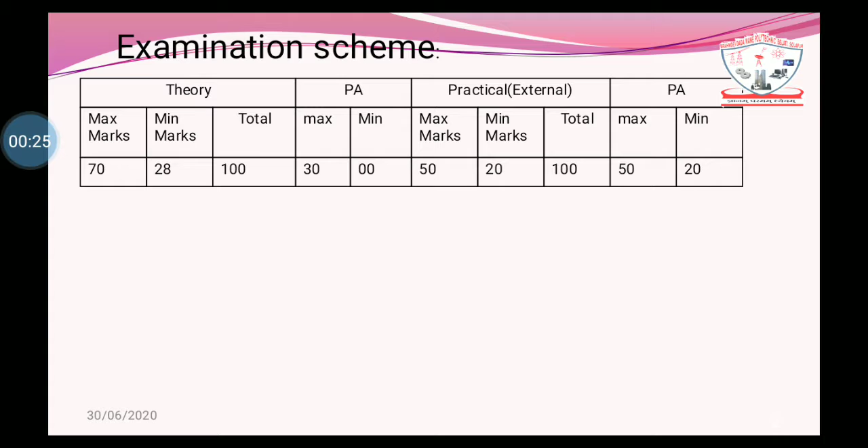So today we will start the session on Advanced Manufacturing Process, under the program Mechanical Engineering 5th semester. In the last session we saw the examination scheme related to this subject. So today we will directly start the new topic, laser beam machining process. Before going to the presentation, we will see a short video of the actual laser beam machining process.

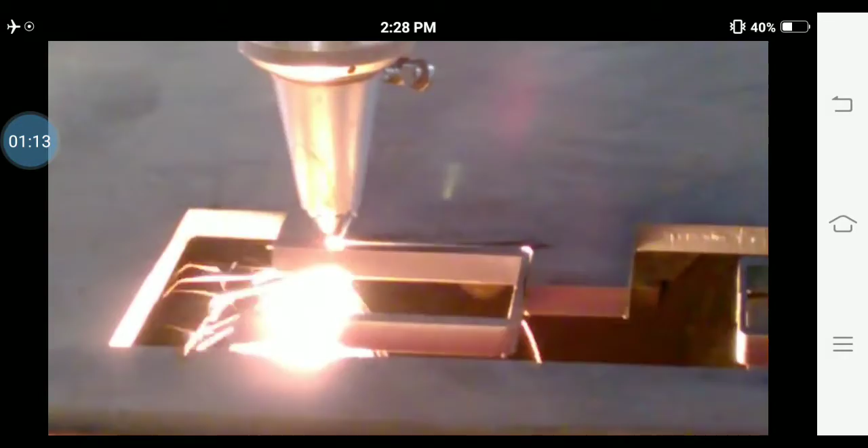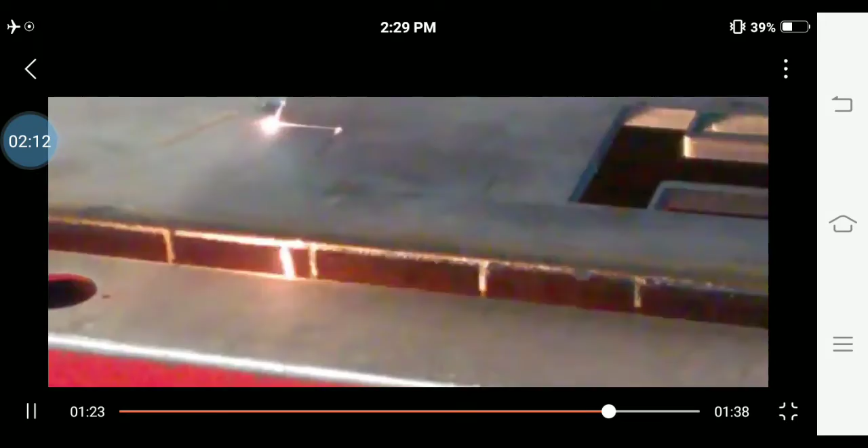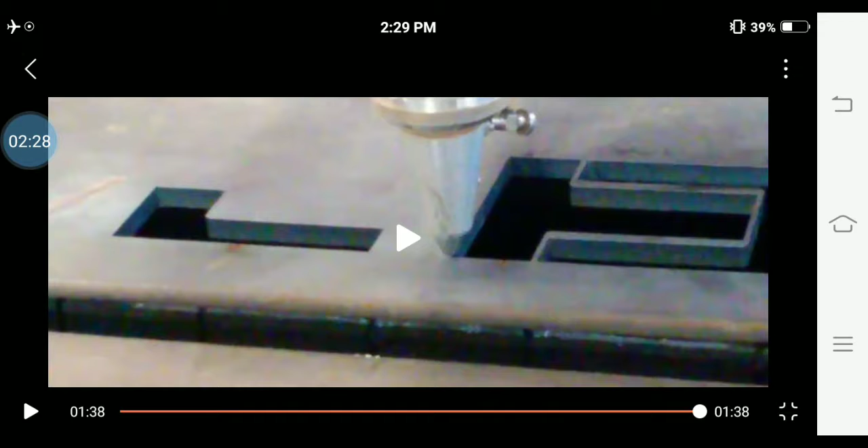Here in this video we can see a laser beam cutting the given plate into a number of different shapes. So here we will see the contents: first introduction, then basic principle, laser concept, actual laser beam process, mechanism of material removal, advantages of LBM and disadvantages of LBM.

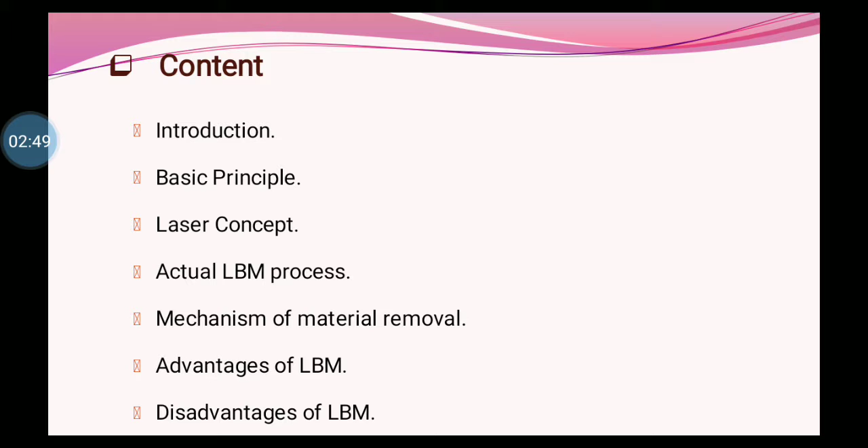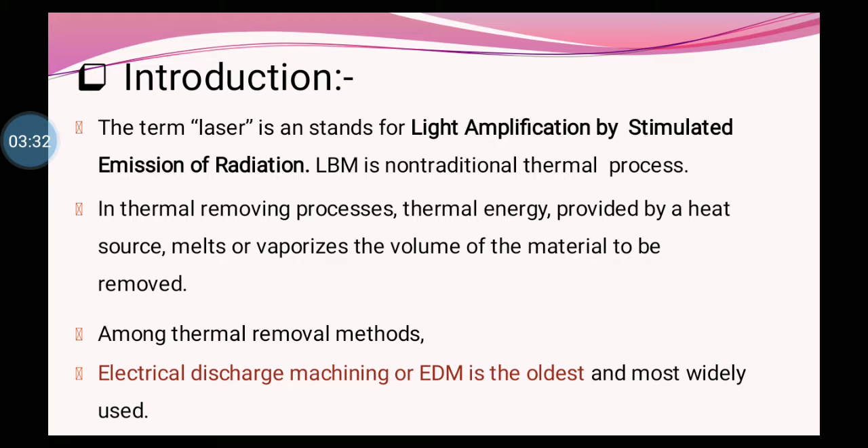So first, in the introduction, the term laser stands for light amplification by stimulated emission of radiation. LBM is a non-traditional thermal process. In this thermal process, material is removed by thermal energy provided by a heat source. It means the volume of material to be removed from the workpiece is melted or vaporized. Among the thermal removal methods, electrical discharge machining is the oldest and most widely used.

So here, the principle: laser beam machining is based on the conversion of electrical energy into light energy and then into thermal energy. It means the electrical energy is converted into light energy in the form of photons, and that light energy impacts the workpiece. There thermal energy is created, so heat is produced in that section of the workpiece and the metal starts to be removed.

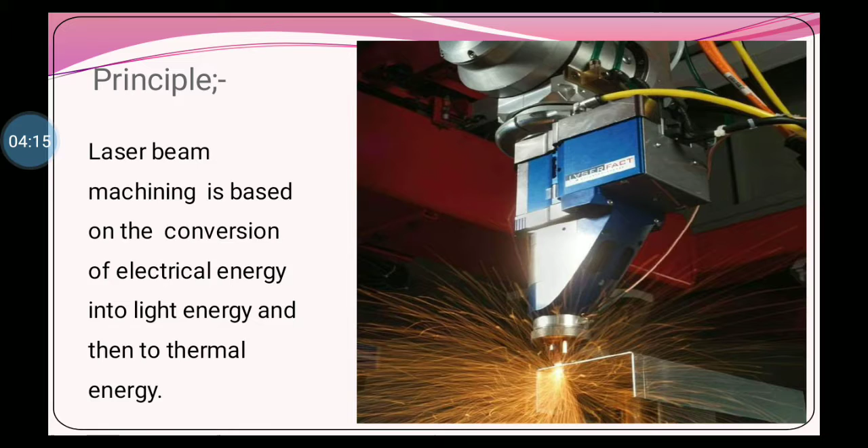Laser concept: electrons, or charged particles, carry some energy related to the orbit in which the electrons revolve. Generally the electrons present in the outermost orbit of the atom take part in the process of energy absorption and emission, and the ground state, the state with lowest energy, is the most stable state for the electron. After absorbing energy, electrons jump to a higher energy level instead of staying in the lower energy level.

It means in the laser, when light rays impact on a ruby rod, or another type of laser rod, the energy is absorbed. When the energy is absorbed, the electrons inside the atom jump into the higher energy level. So at that time they are unstable.

We can see in the diagram that the electrons of the outermost orbit jump to a higher level orbit. At the higher level orbit they are unstable, so they return to the ground state, the low level. When they travel from the higher level to the lower level, they emit some photons, and those photons work as a laser. That is the basic photon emission model.

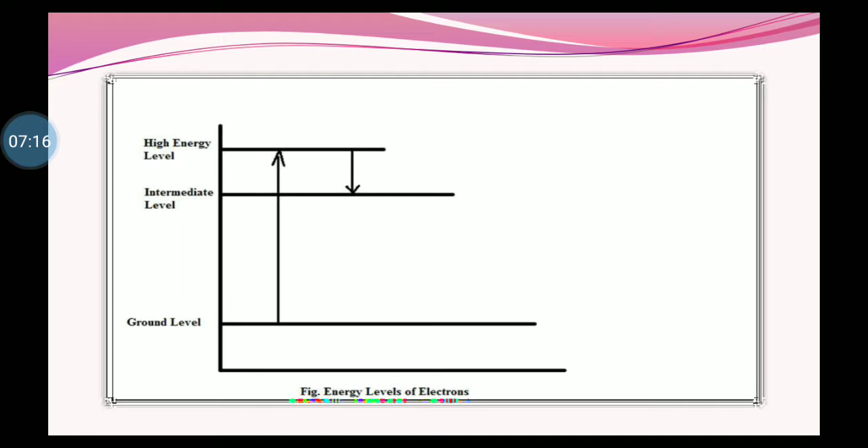In lasing action, the emission of photons is not done by only one atom at the upper energy level; under the influence of external light, a short chain reaction occurs and one atom after another starts emitting photons. This is called lasing action. In the diagram, electrons go from the ground level to the higher energy level, then travel back from the higher level to the intermediate energy and to the ground state level, and at that time emit a photon.

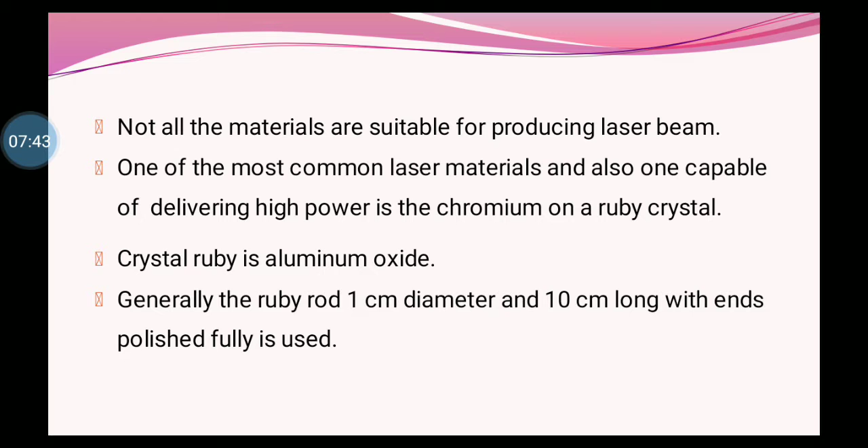Not all materials are suitable for producing a laser beam. One of the most common laser materials, and one capable of delivering high power, is chromium in a ruby crystal, with 0.05 percent chromium in the ruby crystal of aluminum oxide. Generally a ruby rod of 1 centimeter diameter and 10 centimeter length, with fully polished ends, is used.

So in the actual LBM process, in the beginning the atoms of the crystal are in the ground state. When light flashes from the flash lamp, at about 12 flashes per minute over the crystal, most of the atoms are raised to the excited state. Some light waves inclined to the axis of the crystal will leave after only a few reflections without striking a mirror.

Some of the waves travel parallel to the axis of the crystal. When the chromium is excited, it spontaneously emits photons, and these photons stimulate other atoms to contribute a second photon. It means when it travels from the higher level to the low ground state level, at that time it emits the photon.

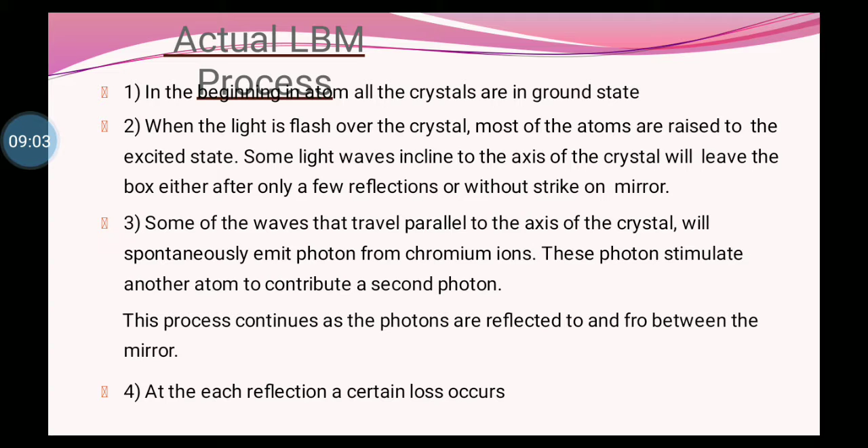This process continues as the photons are reflected back and forth between the mirrors. Two types of mirror are used with the ruby crystal: the first is totally reflective and the other partly reflective, used in the upper section and lower section. Here the electrons flow from the ground state to the higher level state, or you can say the atoms start to get excited from the low ground state to the higher state.

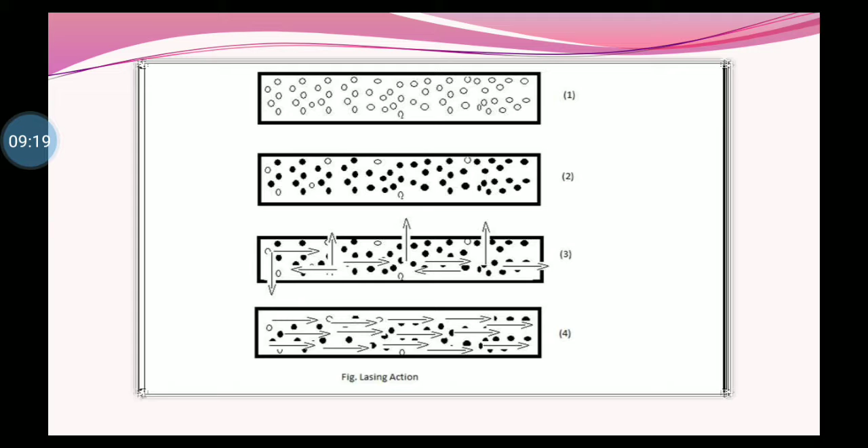So it is very interesting that the laser is used on a material which absorbs the laser energy. Upon absorption of the laser energy, there is a rapid rise in temperature, leading to melting and vaporization and material removal. A cooling system is also used outside of the ruby crystal. Although several types of laser exist, all lasers emit an intense, coherent, highly collimated beam of single wavelength light.

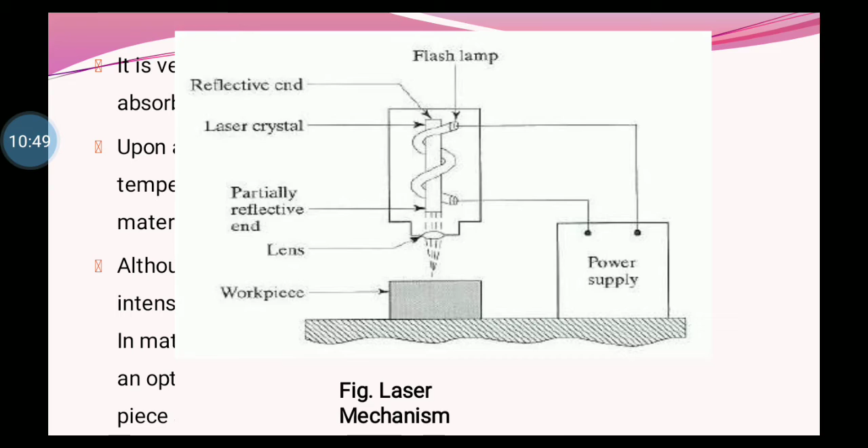In material processing applications, the narrow beam is focused by an optical lens. We can see the lens placed in the lower section of the diagram. So in processing applications the narrow beam focused by the optical lens produces a small and intense spot of light on the workpiece. So here the material is removed in the LBM machining process.

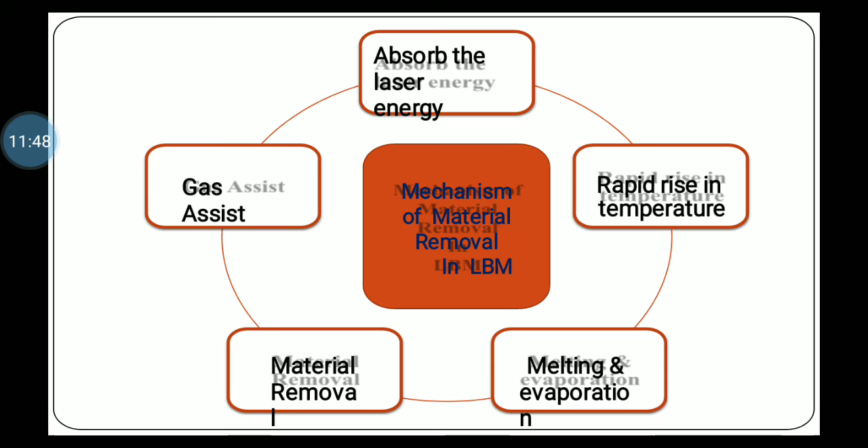After the process, we will see the advantages of the LBM process. This figure explains all the related things. First, the LBM machine absorbs the laser energy from the gas system or any other material system. Then there is a rise in temperature, concentrated on a point at the workpiece, so melting and evaporation take place. After the melting and evaporation process, material starts to be removed. That is the whole basic structure, or flow diagram, of the LBM machining process.

So we will see the advantages. The first advantage is excellent control of the laser beam with a stable motion system, which can achieve extreme edge quality. Laser cut parts have nearly zero edge deformation. It is also faster than conventional tool making techniques. Laser cutting has higher accuracy than methods using heat generation as well as water jet cutting. There is a quick turnaround for a part regardless of complexity, because design changes can be easily made in this system. That is a basic advantage.

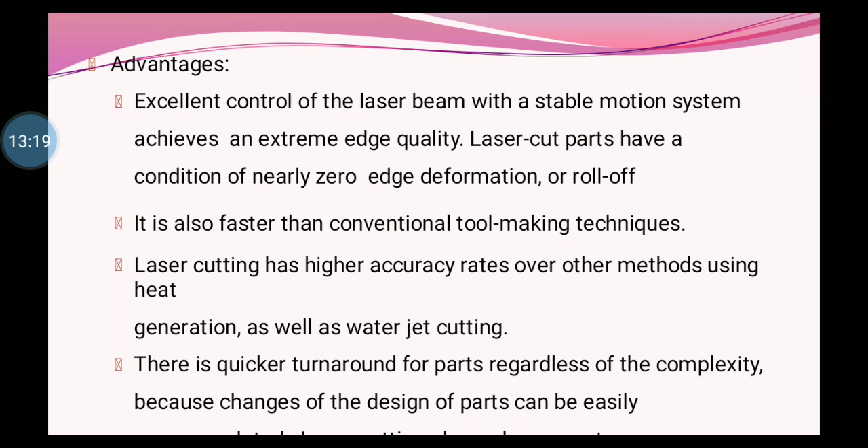It is also used for nylon buttons. When small applications like drilling or cutting are required, LBM is used. Another advantage is that no tool is used, so there is no tool wear, and extremely small holes can be drilled. It can be used in air medium, gas medium, vacuum medium, or any liquid medium. That is also an advantage of LBM. This process is also used for cutting, drilling and welding. So there are a number of advantages of the LBM machine.

So we will go to the disadvantages. First, the material being cut gets very hot in a narrow area, so thermal expansion may be a problem. Another major thing is that the laser requires high energy, making it costly. So it is a major disadvantage. The capital and operating cost is high. An unskilled worker can't operate it; only a skilled worker can.

Another disadvantage is that a non-reflecting surface is required. If we use a reflecting surface in this system, the laser light is reflected from the object. So we want to use a non-reflecting surface for the workpiece. That is also a disadvantage of this system.